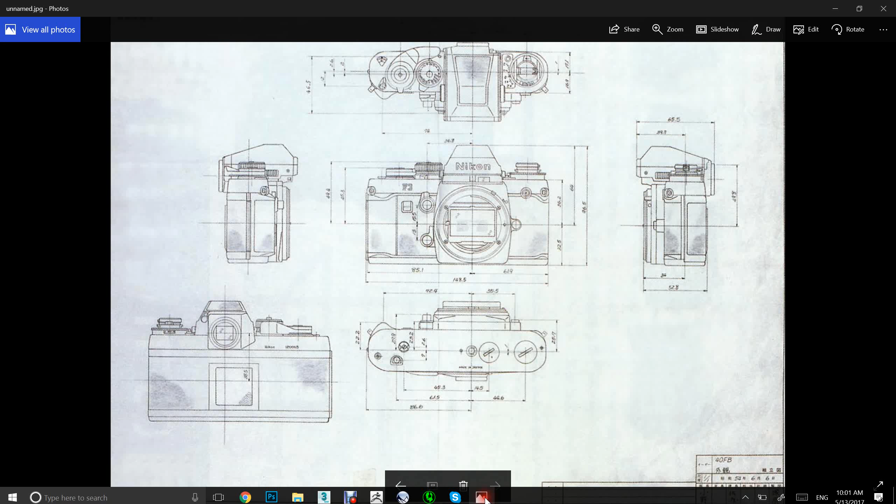So you were working on this camera, and you're running into some of the issues, right? I guess you were trying to bevel this, right? And it's breaking because the geometry is not even. Looking at the reference, oops, sorry. When I look at the reference, it looks like this portion is actually very round around the edges, and even in the actual picture.

Let me see if I can pull the picture up. Now you see this portion right here. On the actual camera, this is nice and round. So maybe we can actually just go that route. And I was thinking instead of having all this information right now, we can get rid of it. So let me just see if I can clean this up a bit.

And obviously this is gonna weld all these points. Yeah, the problem was that I was only looking at the front shot and the back shot, so it looks straight. Right. Oh, I see. And then when you look at it from the top, you see it's different. Yeah, so let me just delete some of this stuff because we won't need it, at least right now we won't need it at all.

And then I'm just going to merge this. You can go right here into weld and hit OK. Well, if you right click while you're holding the points, you can see all the options here. Break, connect, extrude, weld. So I'm going to delete this bottom part. Try weld again. It's having trouble welding some of this stuff.

If we look at this reference right here, it looks like it's pretty round actually, for the most part. And then if we look at the actual camera, we only see this part. This is the part that we're looking at. It's pretty round. It has two divisions, one for the body that has this nice texture at the bottom, and then you see this line right here. It goes all the way, and it's the same elevation all the way across.

So we can actually do that. It'd be nice to do this right now, actually, to close the gap for the top, right? So I'm going to do that real quick. So I already have that. All I need to do is hit this edge, right? Push it over. Actually, let's just do the whole thing. Only the front part. I'm gonna push it over so it meets the first loop, because we need to weld this to each other. So I'm gonna hit it so it meets the first loop.

I'm going to weld it. Only the end points, because those are the ones that actually connect. And then I'm going to do it again. Only the top part. Same thing. The thing is, when you do weld, they both move closer to each other. But if you want to connect this point towards the other point, just do target weld.

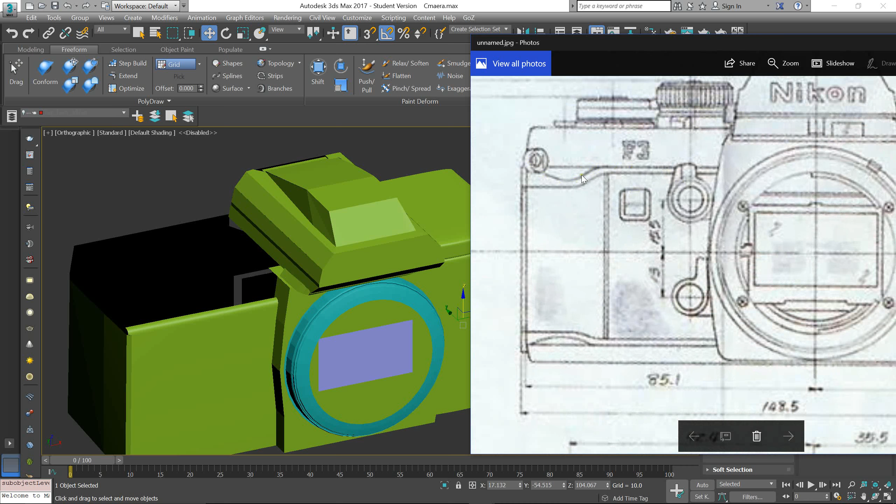Oh, is it this side? No, it's this side, I'm sorry. And some of this detail in here that the base body has this. And you can actually see the body through. And let me just check the picture again. You see this right here? This is actually an edge that bends like this and then it goes to the back. So it's like a little thick piece that's in the body.

To recreate that little piece, and I'll point it out again. This right here, yep, it's the only side that has it. We can go to the front view. I'm going to break Max to one little window just so we can see both detailing at the same time.

Okay, I'm going to go into my primitive box, which is the plus. We had to break things down to simple shapes at the beginning. So what's the closest shape that we can build this from? Probably a cylinder, right? And then we can just inset it down. Yeah, I mean, that's probably the best way to do it.

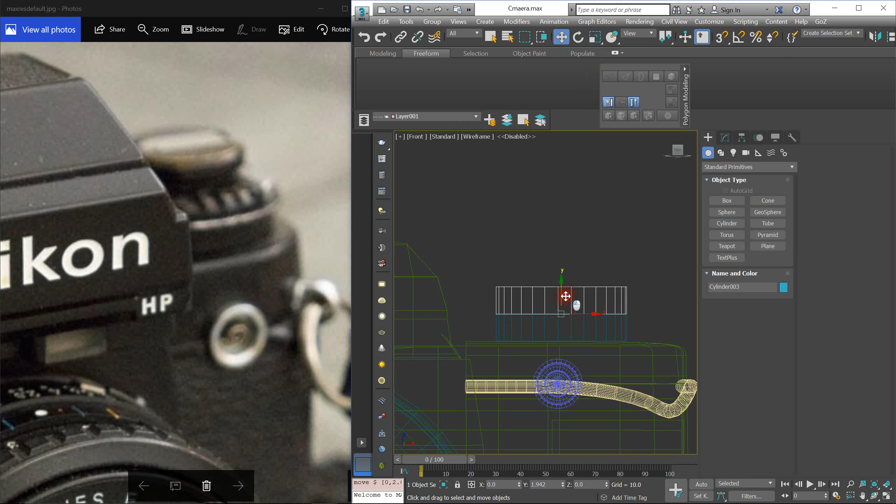And if you hit F4, notice how it's starting to look smoother, rounder, and then from that point forward, you can start. Let's say I want to see how bulky this is going to get. Obviously, we need to push these points inwards more. A quick cylinder again. Front view, move it up. Scaling is probably the biggest thing when you're working. And then I'm going to create a new one. Copy. So you sort of see what it's going to look like. This needs to be, I'm guessing, closer.

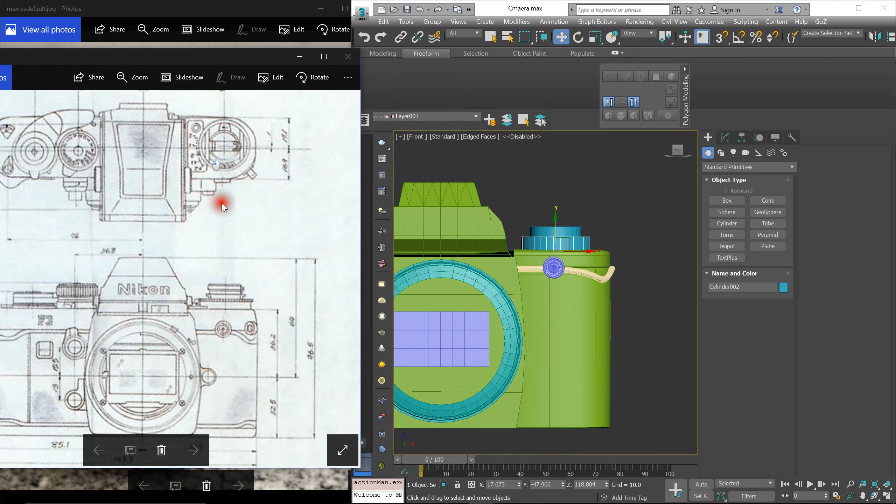Something like that, right? So that's why blocking things down is so important, because you can start seeing the scale of things, and based from this, just like when you're drawing, if you were to take a drawing class, you start putting things relative to each other. So let's say this is my thing. This is how big this is in proportion to this body right here. And then if we look at the top view, notice how big this is within the body. So when you notice how big this is, that means that this body actually needs to be cut around here.

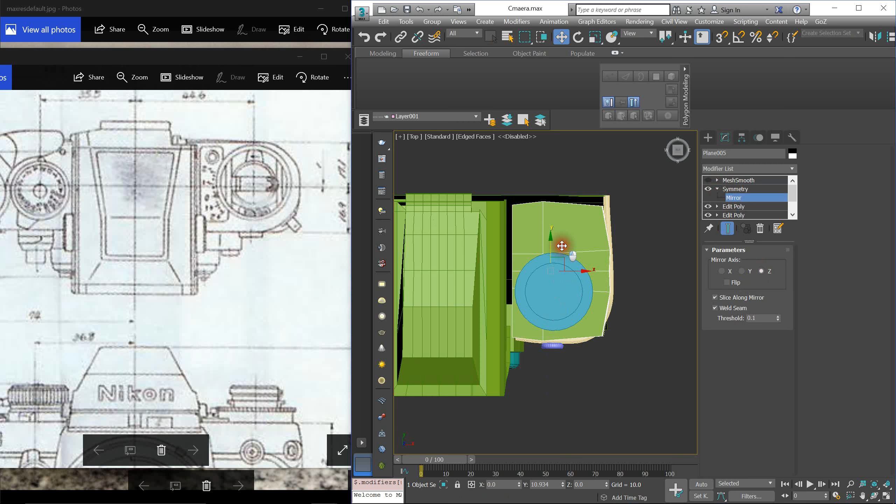For example, if I like this roundness here and I want to put it on this side too, you can easily do a symmetry. So rather than remodeling the whole thing again, you can just go in here, do symmetry, and set it on the, what is it? Not the X, but definitely the Z axis, right? And then go like this. You're only welding a very small point. If we go into mesh smooth, it's going to do that. And then if I set up an edit poly after that, you can push this out more. Right?

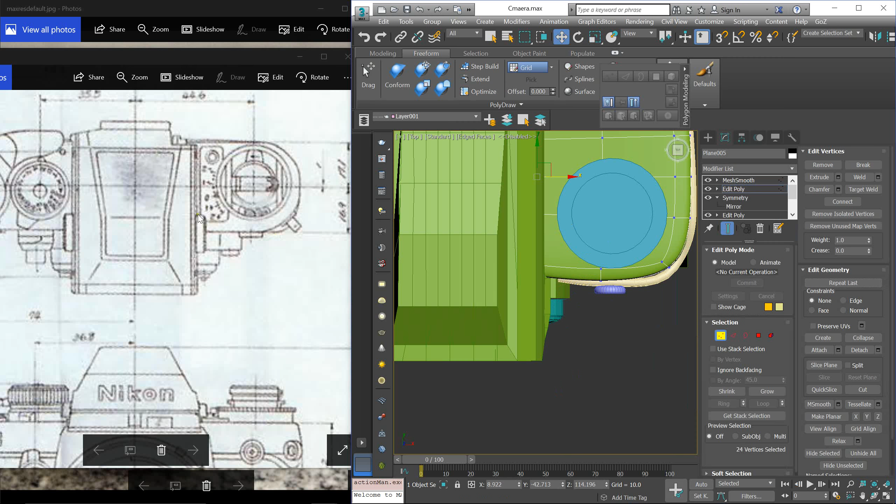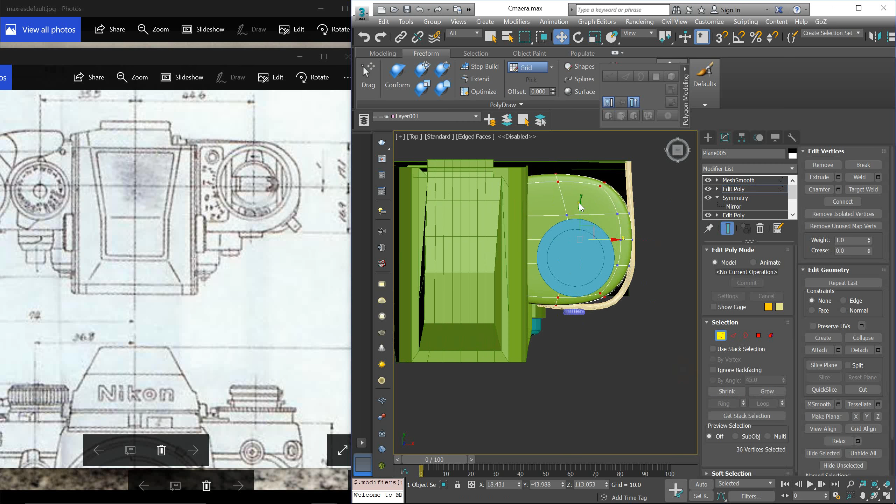And we can start comparing how things are. So you see this case right here, this body, the light, how big it actually is, and in relationship to some of this detail, I can already see that this body needs to shrink down more. So I can go like this, and it definitely needs to come out more too. Or just the proportions in general, this needs to go in. The shape itself is more oval, like that. You see it? Let's see. That's better actually. That means that some of this detail needs to go inwards more. And then you can rearrange it, and you gotta leave the space for this information right here, or just push this out more. That also means that what we did right here needs to be attached more towards it.

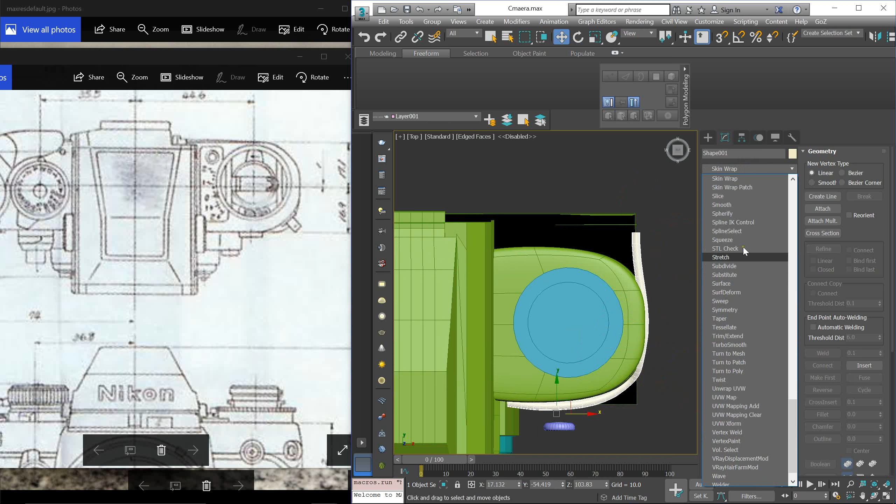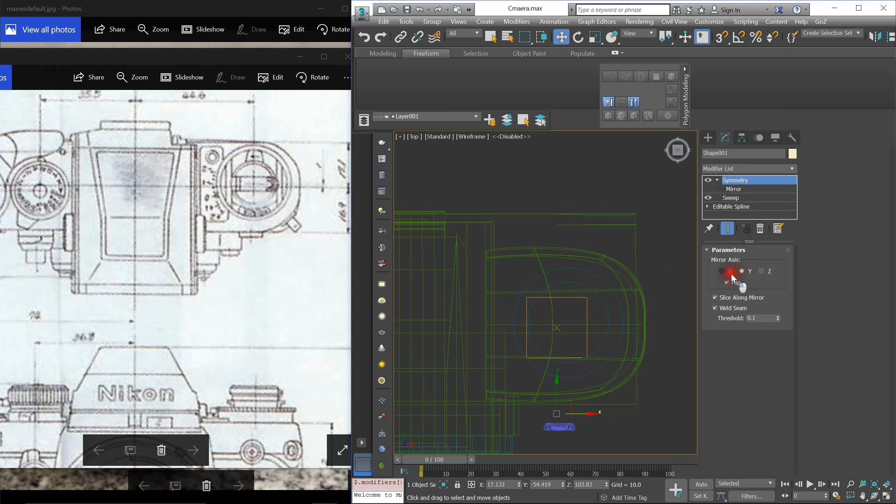You can also do the same process that I did before, in which you can do symmetry to it. You can cut, oh, you don't want to cut that. You can do this, symmetry. And then you see how this is happening. Just go into symmetry, mirror, push it out. If you see nothing is happening, that means that it needs to be flipped. Oops, sorry, I put this in the wrong place. This needs to go first. On the z-axis, we need to flip it. There we go. It needs to be pushed outwards more. So if this is the case, obviously this might need to be up on this side. I don't know. But this is the sort of stuff that we start getting into.

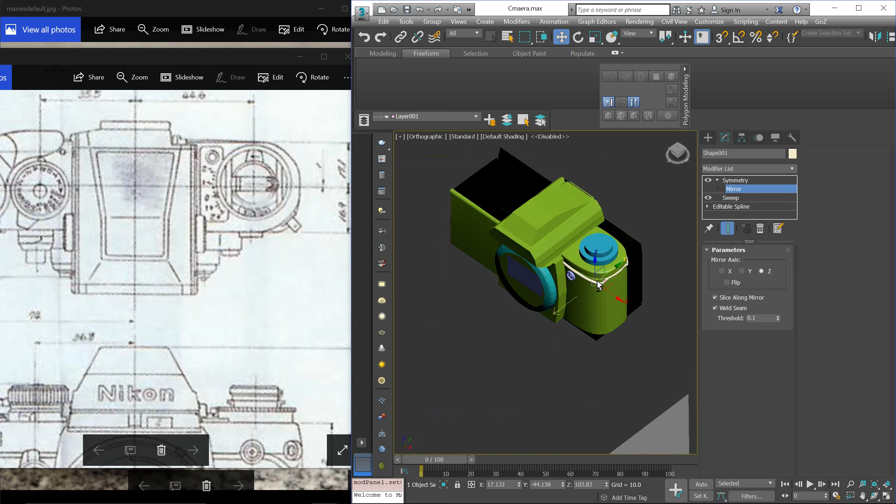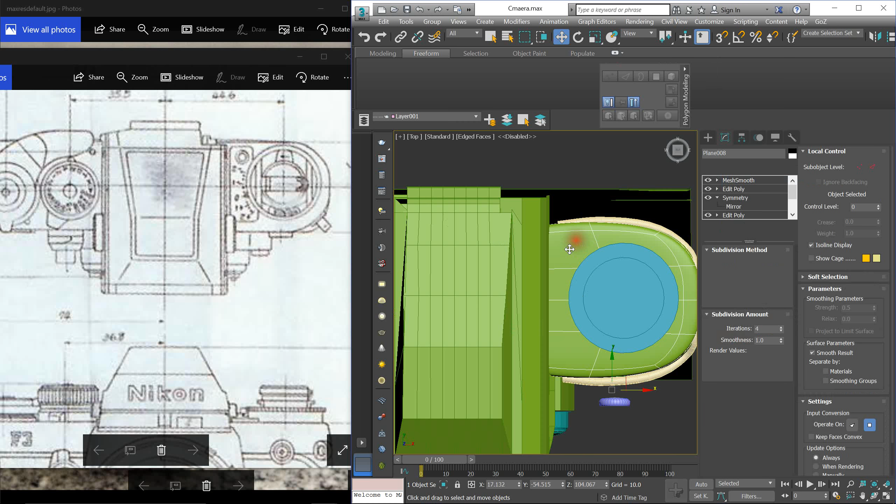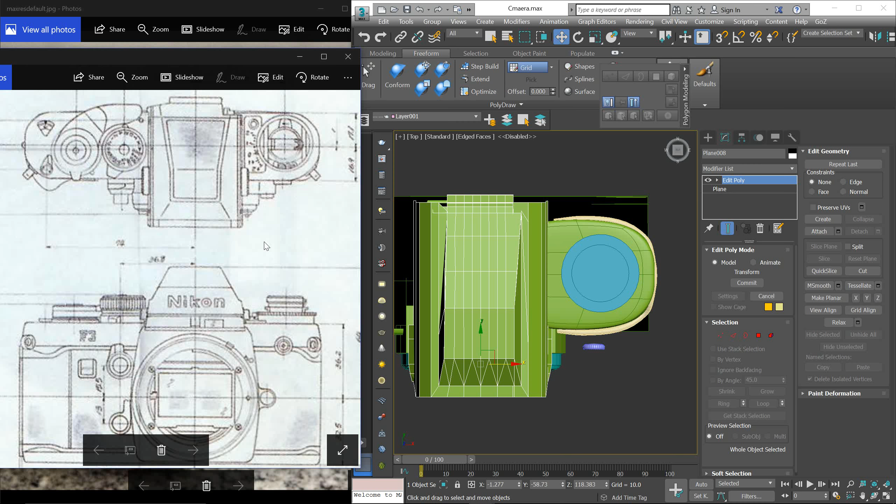Blocking is very important, because once you have the blocking, you can start pushing things out or pushing things inwards. From this diagram, I can tell that this needs to be wider, and that's the reason it's looking shorter, because it's just wider. If you have this block down right here, you can push this inwards more, so it matches this. And notice the shape right here. You see how this goes like this, goes in, and then goes like that. That sort of stuff you definitely want to start looking for. And then from that point forward, you can start rearranging things based on where they are. So yeah, cool.